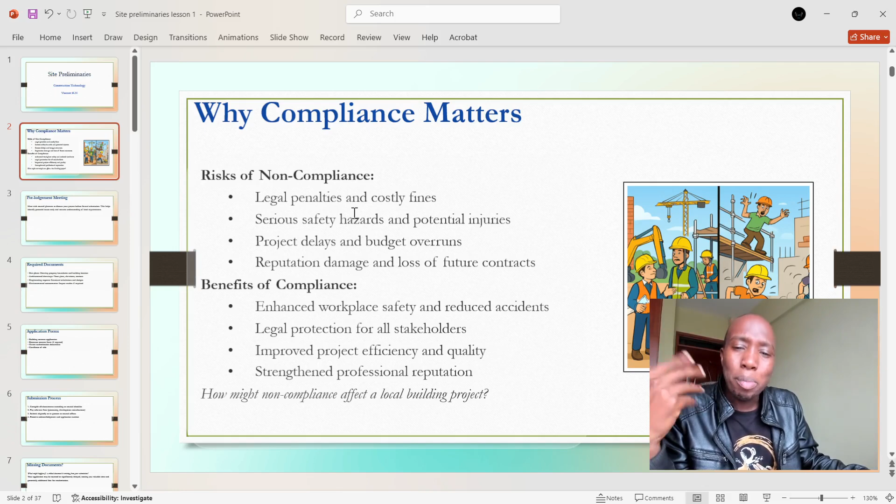There is integrity, there is competence, because we don't want a situation where buildings are collapsing, where roads are getting issues before they get to their period. So yeah, there are different risks of non-compliance. You can receive a penalty. Someone can die because of a head injury. Maybe project delays, yeah, because of incompetence.

Non-compliance will also cost you a lot. If you are caught being non-compliant, maybe with the OSHA Act, your license can be taken from you, and that won't be good. So it is important before you carry out a construction activity that you have meetings, maybe with a building team. You have meetings with the respective personnel, that you discuss the project before you submit it for approval. This is before submission.

Before submission, you talk with the client. Is this what you want? So that the thing that will be approved should be the final idea, the final project that the client wants to be implemented. It's important also for the client to understand the regulatory requirements of maybe the counties, the regulatory bodies.

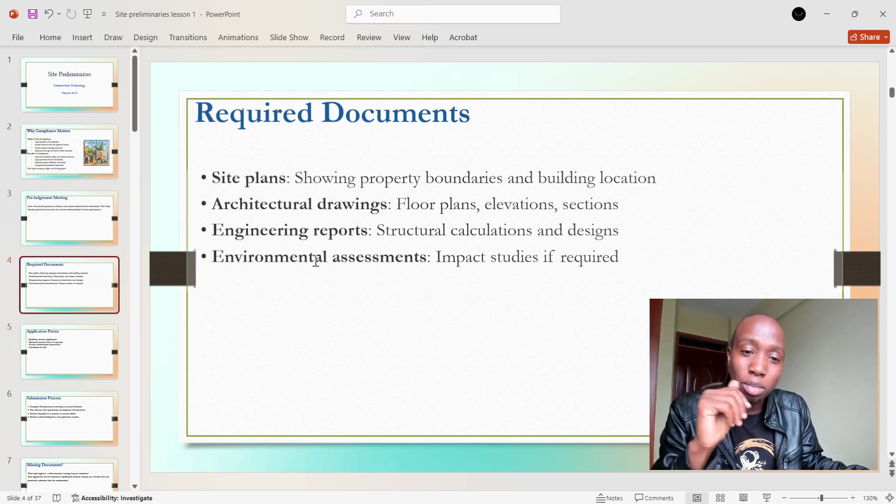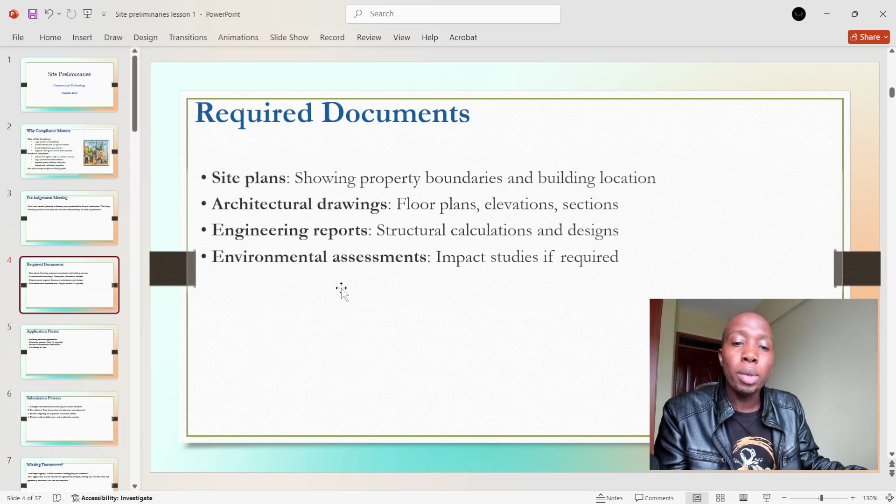Yeah, it's important. Required documents: you'll be required to have site plans, architectural drawings, engineering reports, maybe structural calculations and designs. You'll also be required to have an environmental impact assessment. Mostly this is important, especially now we are looking at greening. We want to see what will be the impact of this project on the environment, the effluents. Will there be any effluence? Will there be noise? We want to see that assessment. How many people can benefit from this? Okay, so that's something else.

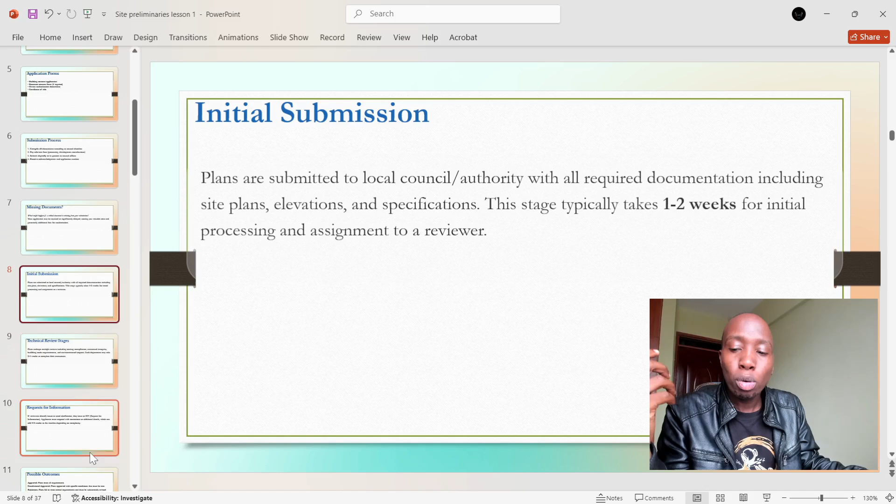So you compile all the documents, you pay the relevant fees, you submit digitally or in person, and you also receive an acknowledgement. After you submit, it might take a few weeks before final approval. And then there are three possible outcomes. Your plan can be approved. It can be approved with specific conditions. Maybe you are asked to confirm this and that. And then it can also be rejected.

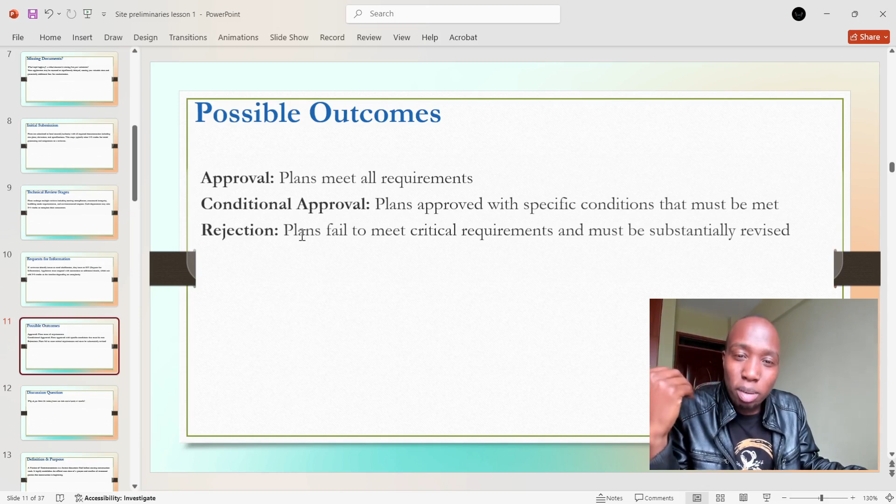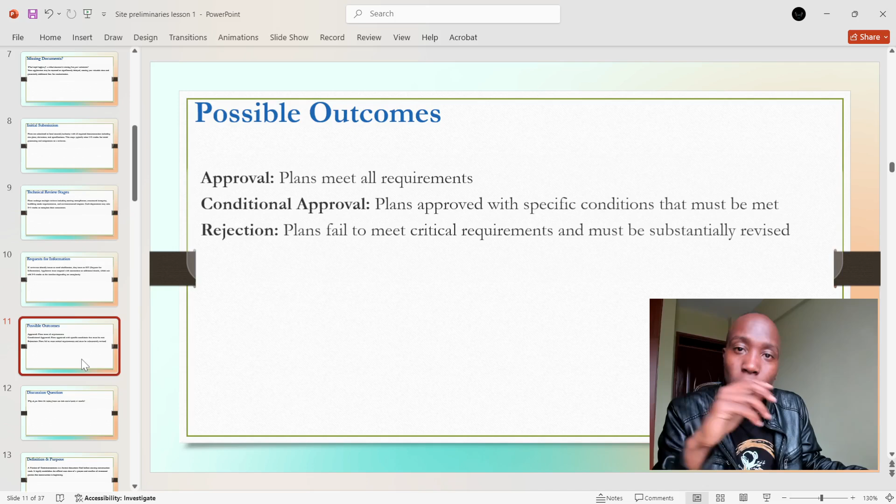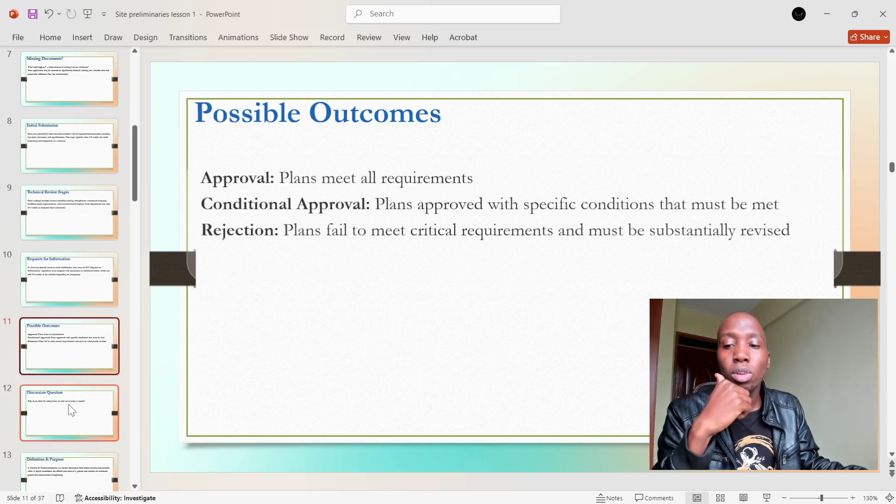Why can it be rejected? If it does not meet the threshold or the criteria. For instance, the regulatory bodies know the soil conditions of certain areas. So if you want to erect maybe a building that has more floors than the prerequisite, or that causes more harm than good, then it's absolutely going to be rejected. So just think, why do you think the review process can take several weeks or months? What can make it take long? And what can you do to have it take less time? Think through that.

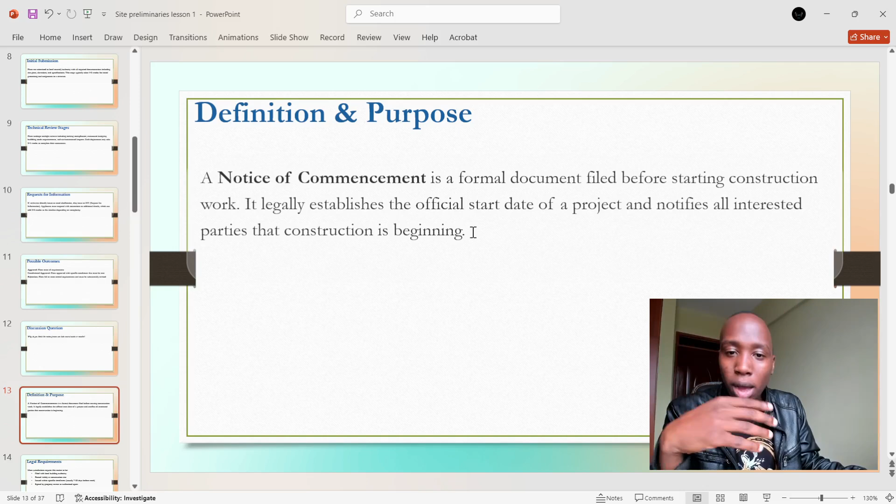Okay, so let's also talk about the notice of commencement. When you now want to start, this is an official document that legally establishes the official start date of a project. It notifies all the interested parties that construction is beginning. So it's important to know that it has begun. If you are doing your time analysis, this is the first event, the beginning event, and all the other activities come after it. Okay, so we have that.

It's important that, before work, most jurisdictions require the notice to be filed with the local building authority so that they can know there's construction going on.

It should be posted visibly at the construction site that the construction is ongoing. It should be issued within a specific time frame, usually 7 to 30 days before work. It should be signed by the property owner or authorized agent, for consent that this is my project and

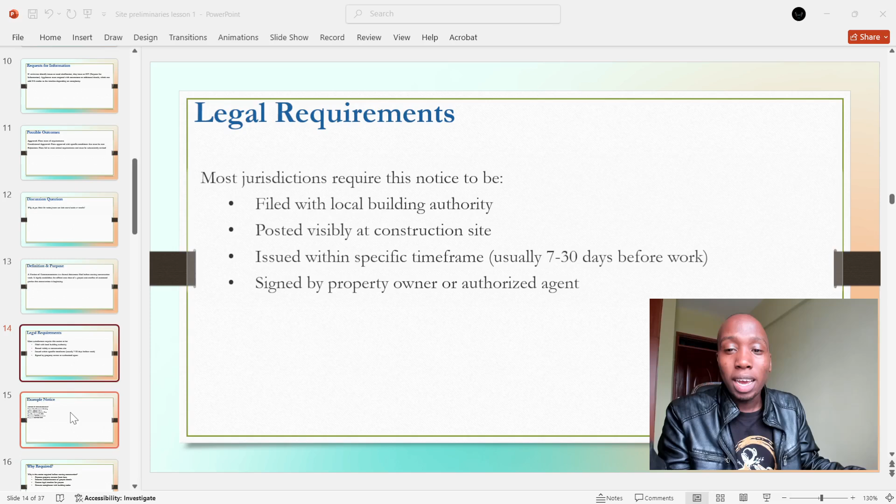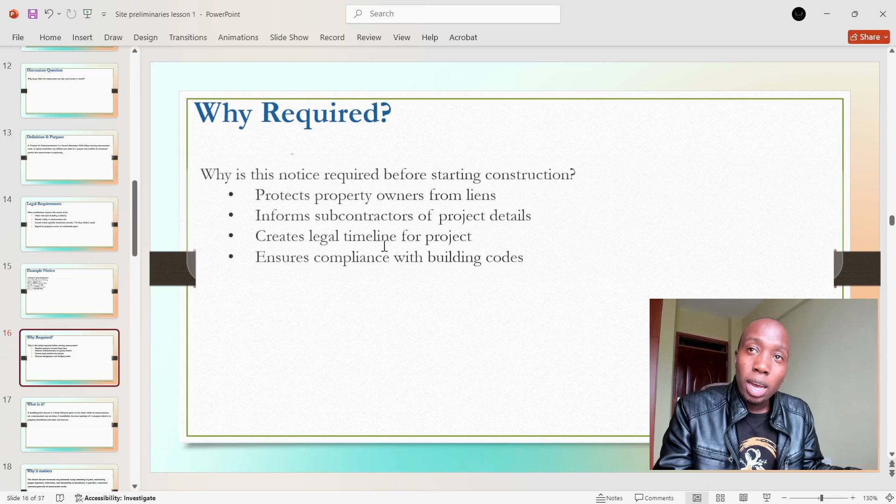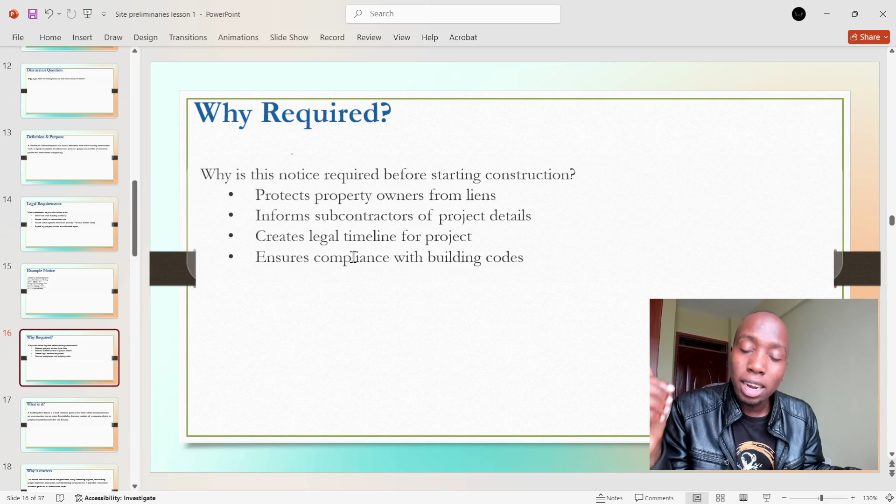Why is it required? It protects the property owners from liens, informs subcontractors of project details. So nobody will come and say, oh, we didn't know that there's a project that's happening here. It also creates legal timelines for the project. So if the contractor said he is going to complete this work in 2 years or in a year, it marks a specific timeline: if it started on 2nd August 2022, then it has to be completed before 2nd August 2024. Payments will also be referred to the timeline that it started.

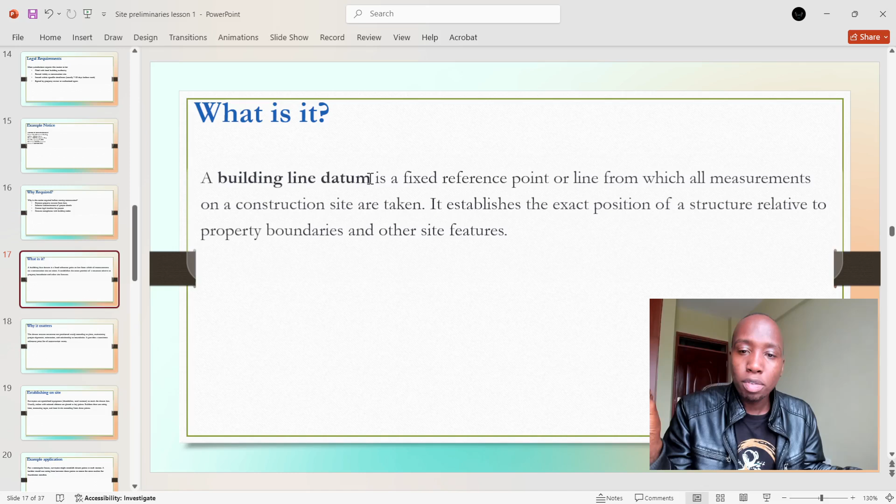All right. So in buildings, after that, we'll have setting up of the site. We'll have what you call a datum line, which is a reference point. So reference points are, if you have maybe a specific elevation of that area or a benchmark, from whence all the other points will be mapped. So it's important that you set up a datum point, which is a fixed reference point or line from which all measurements on a construction site are taken. It establishes the exact position of a structure relative to property boundaries and other site features.

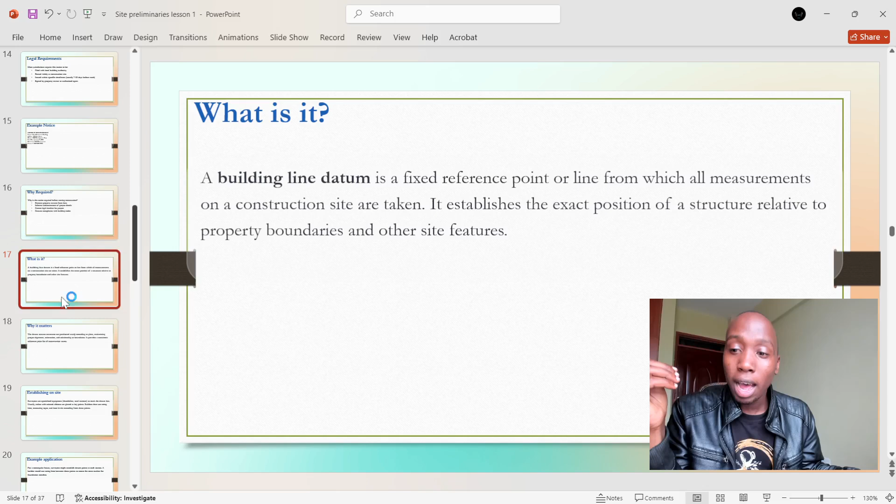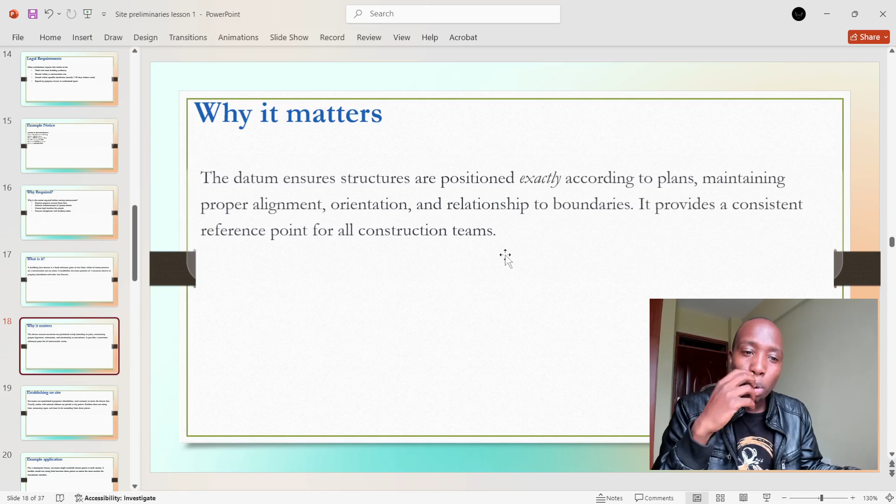Why does it matter? The datum ensures that structures are positioned exactly according to the plan. It's important. I recently saw a building where the water could not flow well, even when you are doing some cleaning, simply because there was an imbalance when transferring those levels from the datum. So it brings proper alignment. You don't want to see a building looking as if it can fall anytime because of lack of alignment.

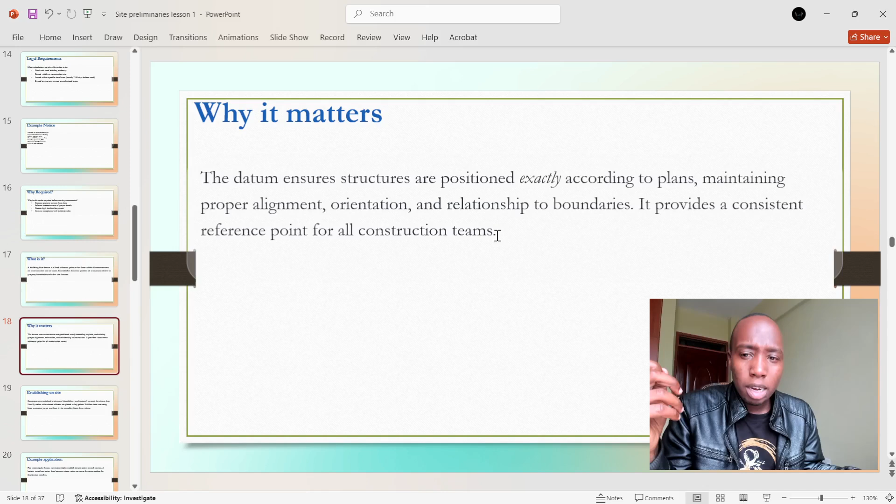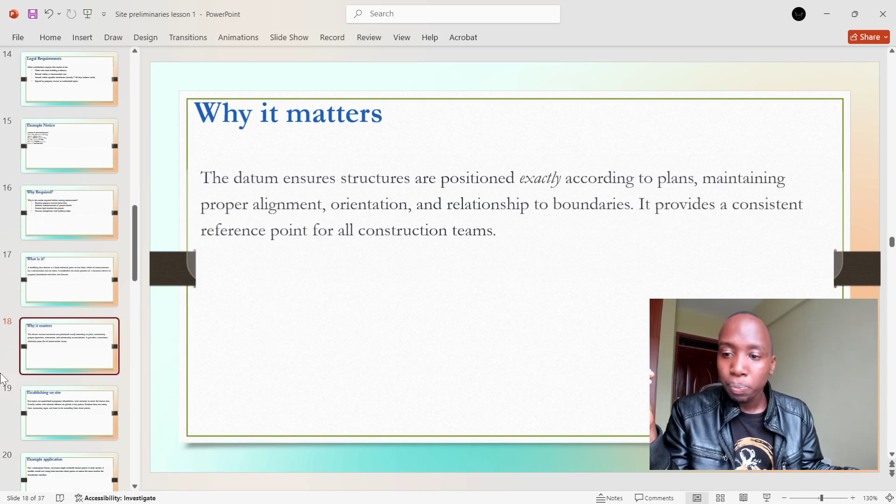So we need to focus on how we transfer our levels. Our levels should be transferred from the datum points to the columns, to the structural elements themselves, even to the walling units. You can establish them by surveyor specialized equipment such as theodolites and total stations. We have laser scanners, new technologies of transferring this data.

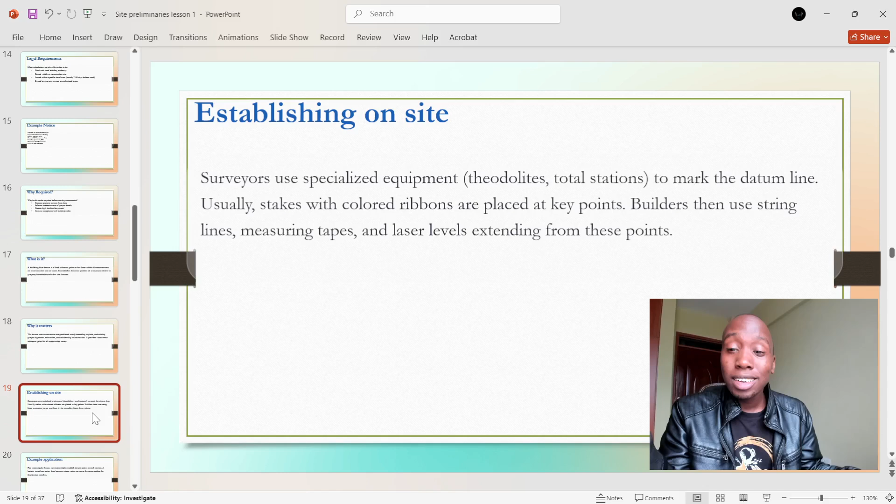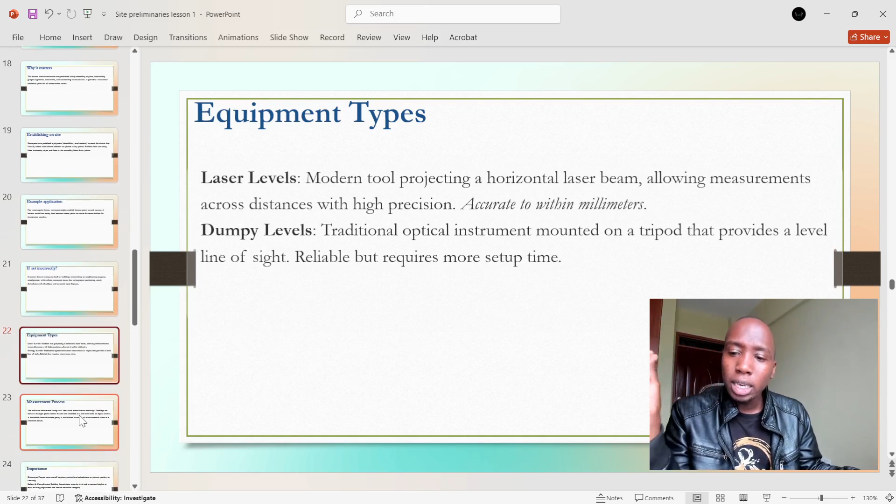So there are different types. You can have laser levels. We also have dumpy levels. I know you've interacted mostly with dumpy levels. Maybe you can just familiarize yourself with laser levels. It's modern. It's very accurate, to within millimeters. Any small inaccuracy you can easily detect because it's a laser.

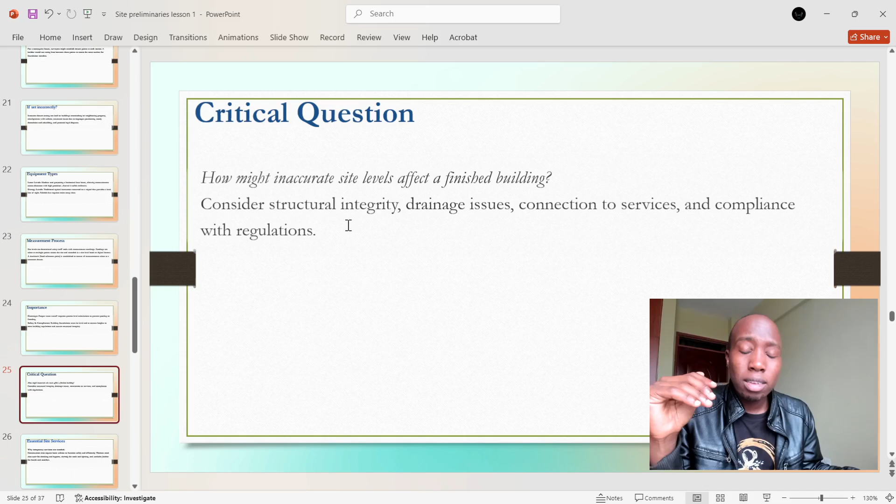Okay, it's a laser. So the critical question is, how might inaccurate site levels affect finished buildings? Just try to think through: consider structural integrity, drainage issues, connection to services, and compliance with regulations. Feel free to pause and check in after that. Okay, good to see you again after thinking through that.

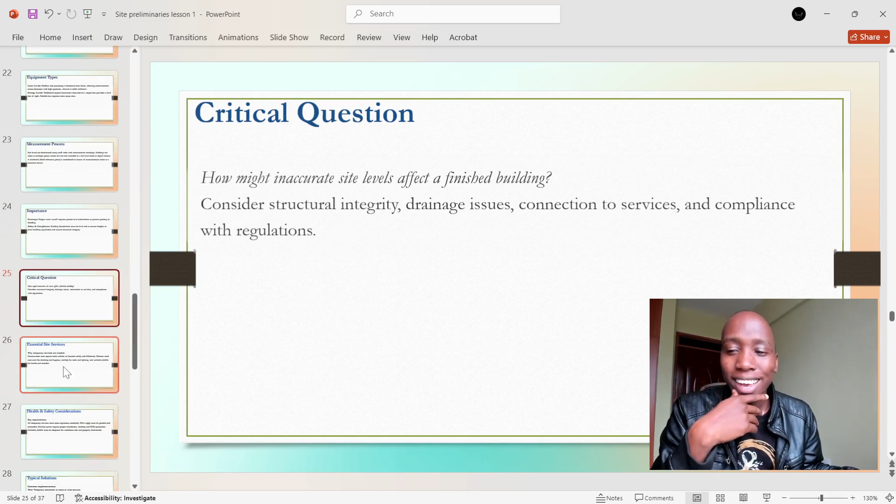So we talk about essential site services. Why are temporary services needed? Construction sites require basic utilities to function safely and efficiently. Workers need clean water for drinking and hygiene, electricity for tools and lighting, and sanitation for health. So first of all, it's one of the basic needs. You need to provide water even for drinking. Before we talk of anything else, water for drinking should be there.

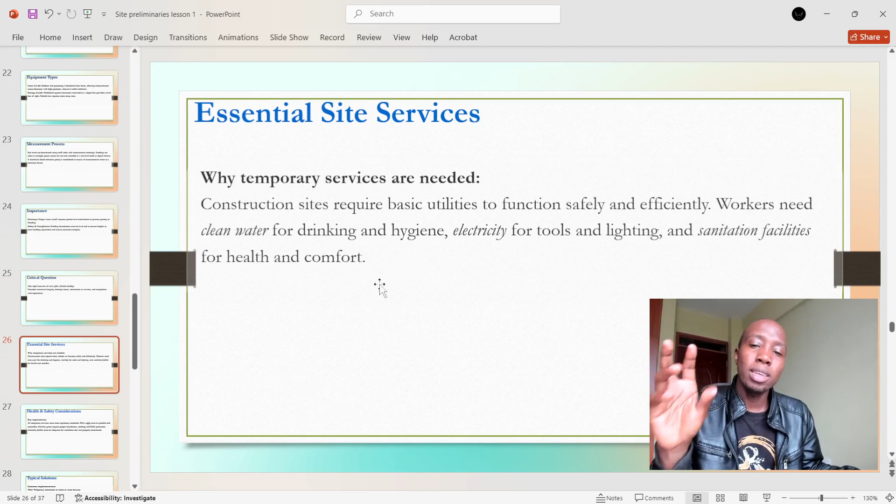Electricity for lighting, security. We need to talk about sanitation facilities. Do you have restrooms? Where will the employees rest? Where can they go when they need to relieve themselves? These are the essential temporary services. If you want to sign some things, if you want to store some things, where will you keep them? These are all called site services. So all temporary services must meet regulatory standards. Water supply must be potable and accessible.

We say that even when we construct concrete itself, we use potable water. We don't use raw water when we are handling constructions. So water supply should be potable. Electrical systems should comply with IEEE regulations. So electrical systems require proper installation, earthing, and protection.

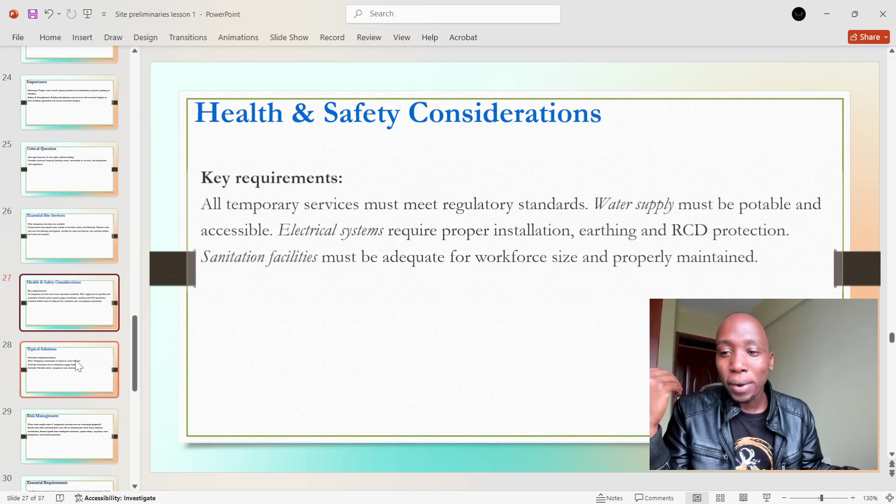Sanitation facilities should comply with the OSHA acts, sorry for that. Sanitation facilities must be adequate for workforce size and be properly maintained. All right. So we have common implementations. We have water: temporary connection to the mains, or maybe water bowsers. We have electricity: generator set, or a temporary supply from the grid. Sanitation: we have portable toilets or temporary waste connections. You can also have pit latrines, temporary pit latrines that can be situated at a particular place.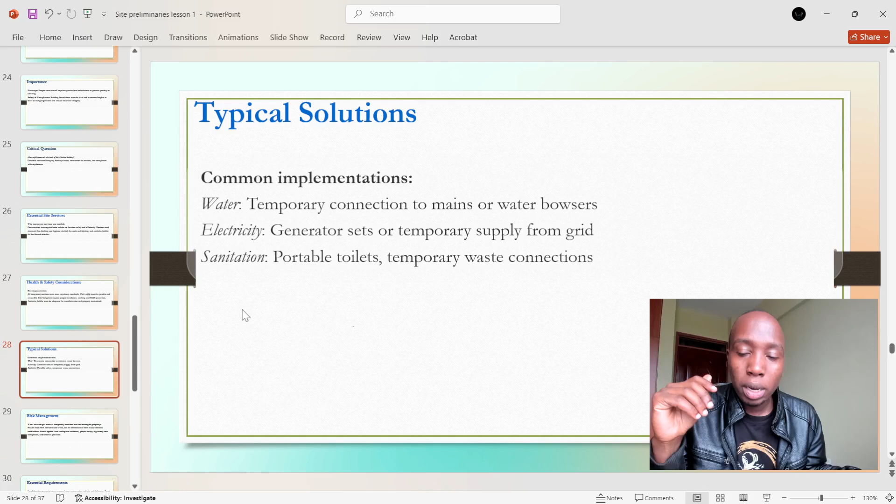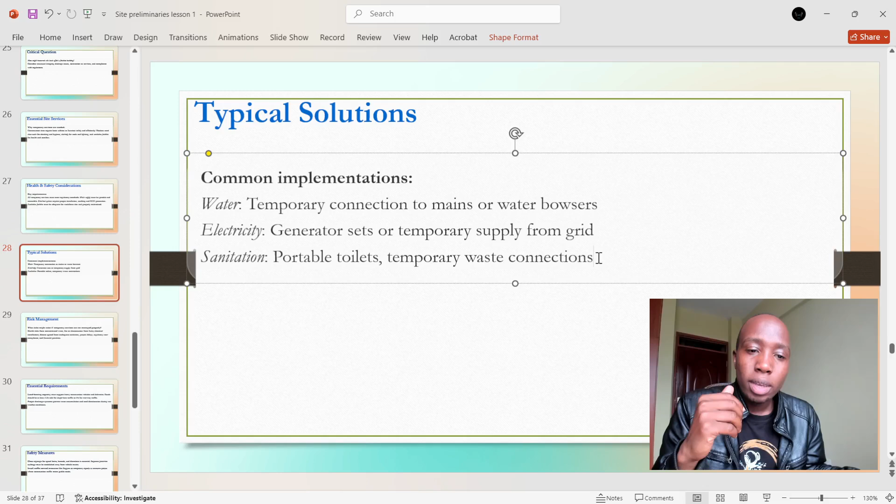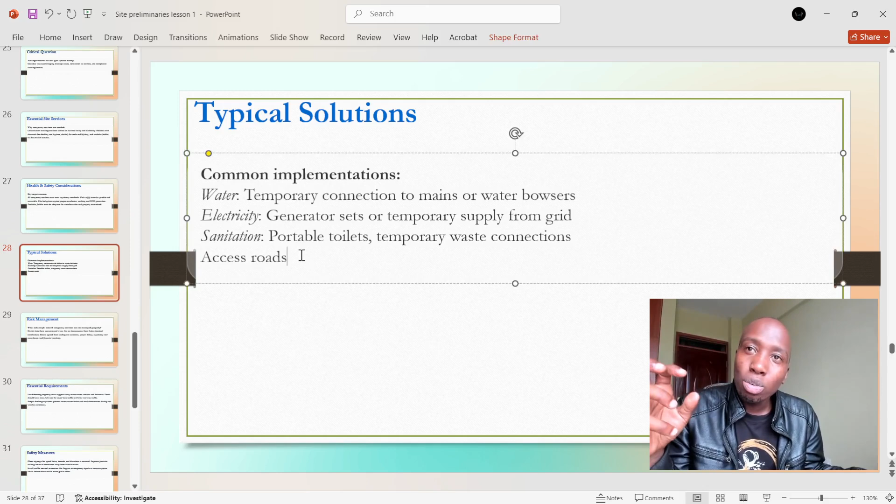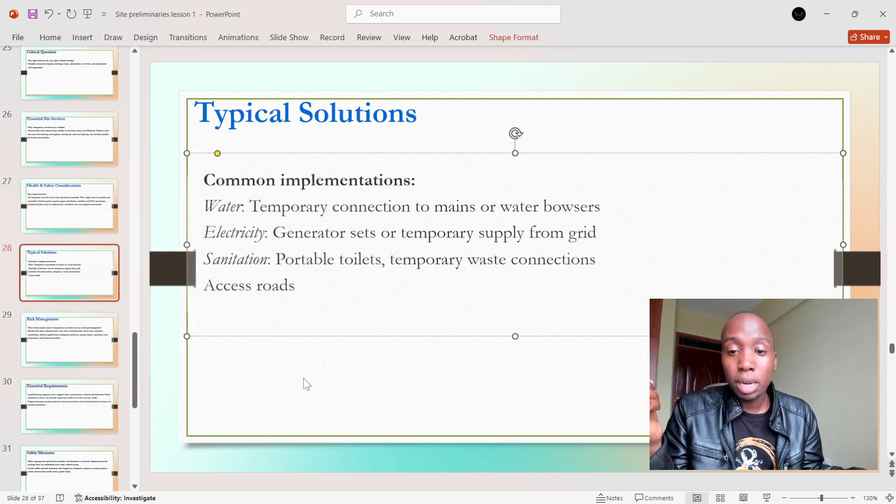We also have access roads that have not been mentioned here. Access roads: how will you access this site? So it's important that access roads are included, let me include that. You don't want a situation where you're bringing materials but you can't get to the site because you've not invested in having access roads. You can use different materials to pave access roads. You can use murram, you can use cabros, you can even use stones, and various other materials.

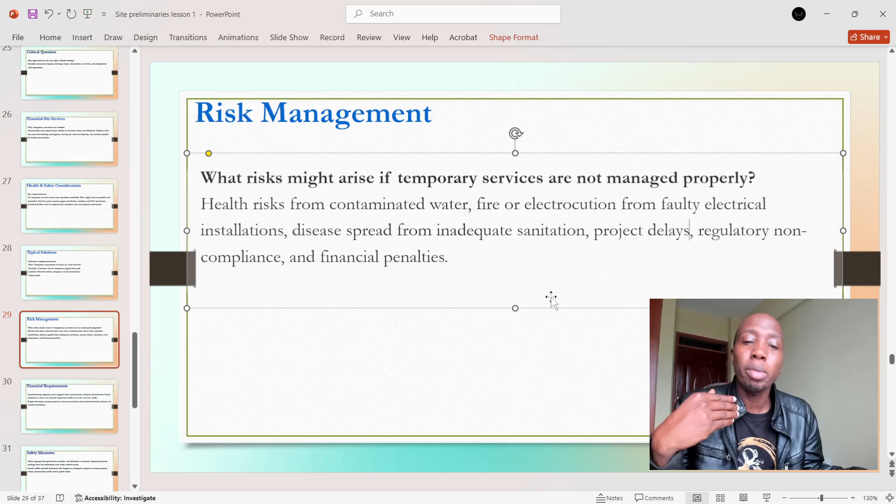So just think through what risks might arise if temporary services are not managed properly. What might happen? What's the worst case scenario? We can have fires, health risks, electrocution, poor sanitation, project delays. Why? Because if you have a road that does not allow passage of materials, then the project will delay. Okay? So it's important. This might seem of little importance, but they affect the total cost of the project and the total duration of the project.

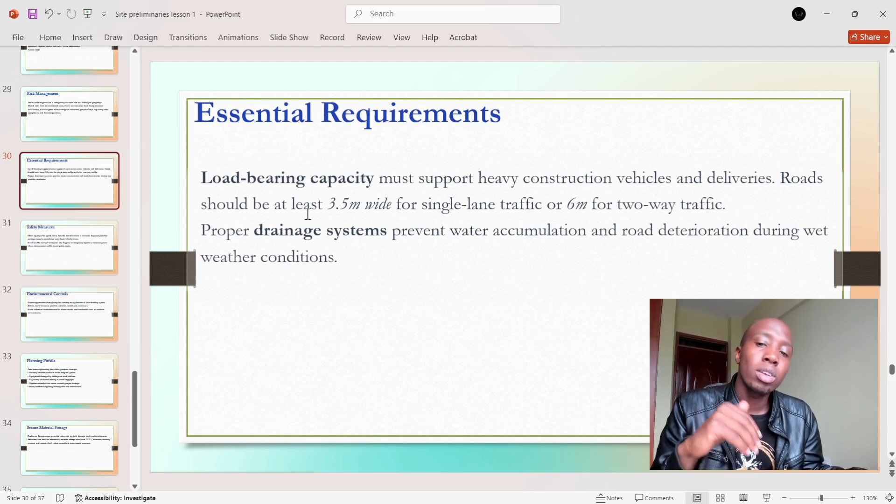All right. So something else we need to talk about: we need a proper drainage system to prevent water accumulation and road deterioration during wet weather conditions. The load bearing capacity must support heavy construction vehicles and deliveries. Roads should be at least 3.5 meters wide for single lane traffic and 6 meters for two-way traffic. We are talking about site access roads. It's important because you are carrying huge stuff, around 20 tons, 30 tons. So you will need to ensure that the road itself has high load bearing capacity. Okay.

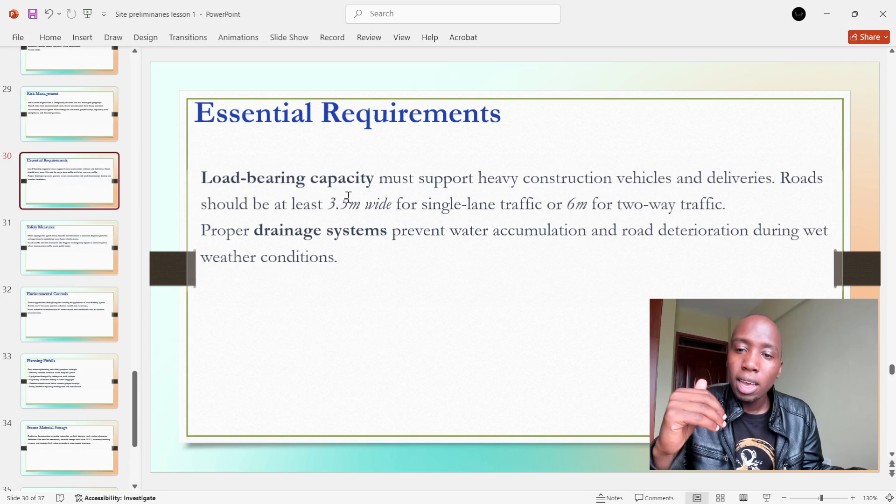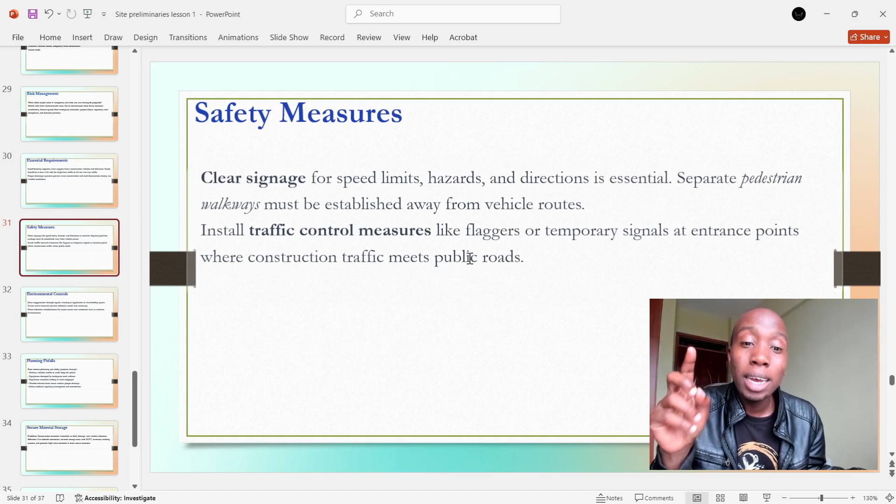You should have clear signs; speed limits, hazards, and directions are essential. It's important to let the people of the community know that there is construction, there are men at work, construction works happening here, so that you reduce traffic. So install traffic control measures like flaggers and temporary signals at entrance points where construction traffic meets public roads. This is very important.

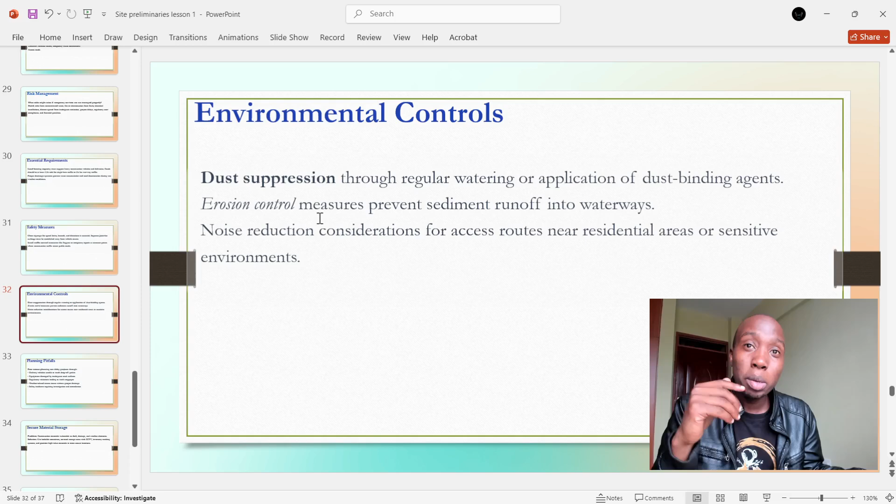Dust suppression: it's important to make good with the community. So if because of the access roads you have a lot of dust, ensure that maybe every 2 days you do some dust control, maybe having a water bowser go through, because you want to be on good terms with the people of the community. It's very important. You also need to think of employing people from that community to do that work and ensure that it's clean. It's good to be on good terms with them.

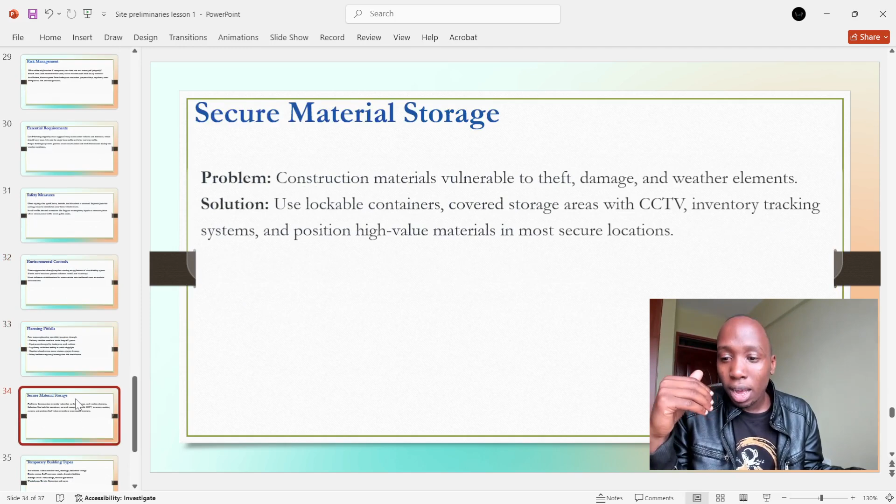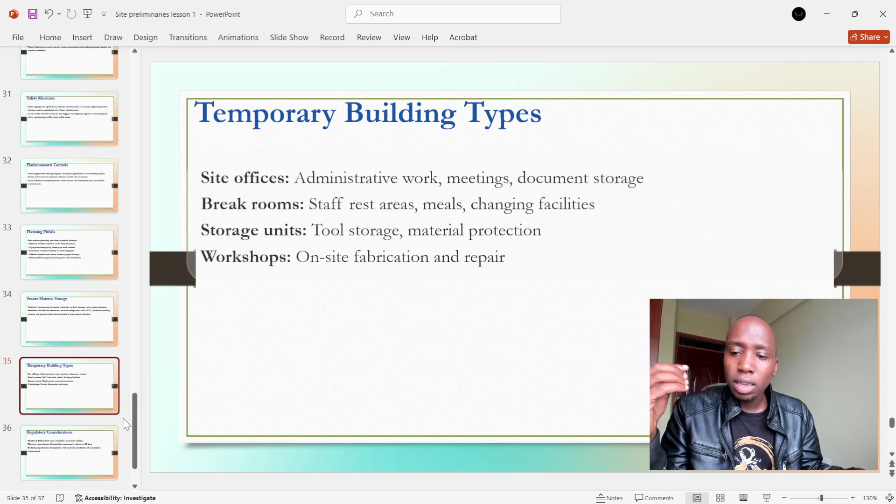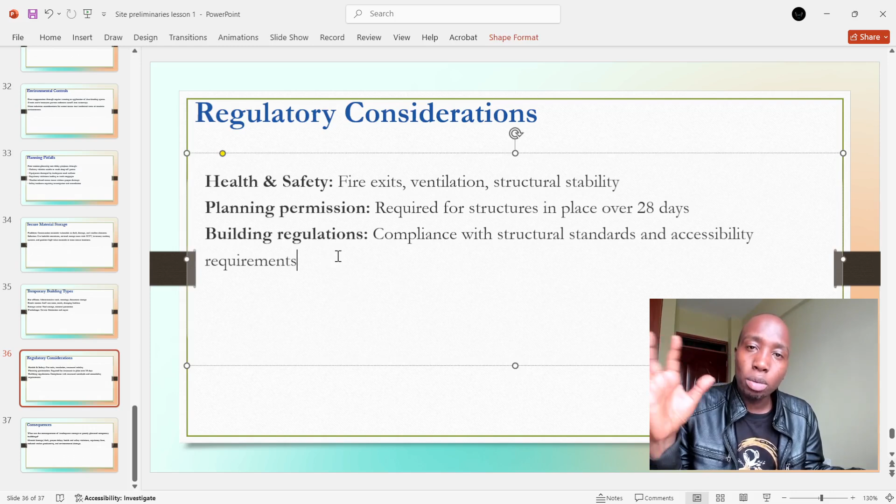So health and safety regulatory considerations: there should be fire exits, there should be ventilation, there should be structural stability. We also need to have a fire free zone. Where will people escape? Where can people get sand in case of fire? All those OSH related acts should be included. All right, so I think with that we are good.